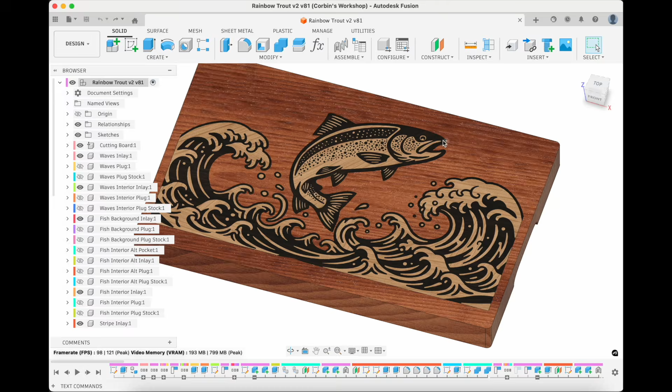I feel like everyone's got their own way of ripping up strips of wood to make an end grain cutting board. But this video really isn't about that process, because I don't think it's really the interesting part. The more interesting part is the design, shown here in Autodesk Fusion. And the design was heavily influenced by this bit, a tapered ball nose.

And before I did any design work, I had to do a bunch of tests to figure out what fit parameters would work best for this bit. I also wanted to figure out the smallest line width that I could actually create. I may do a dedicated video about how to design V-bit inlays for a tapered ball nose, but I'll throw a few tidbits in here and there when I make this project.

One interesting thing I did during the glue up was to come up with these L-shaped cauls to help keep the ends aligned and flat. And I simply remove them after I have a few clamps on and everything aligned. If you're curious about the wood, this is maple. After the glue dried, I planed it and cross-cut a bunch of pieces to a rough size of 1.7 inches.

And it was just a repeat of the same process before, but I didn't really have to get it perfectly aligned. But notice that I did wipe all the glue off the top. And I didn't have to do any additional prep. I just mounted it upside down on my spoil board using some side clamps to hold it on tight. Once I verified it was cutting right, I threw the split dust boot on to keep chips at bay.

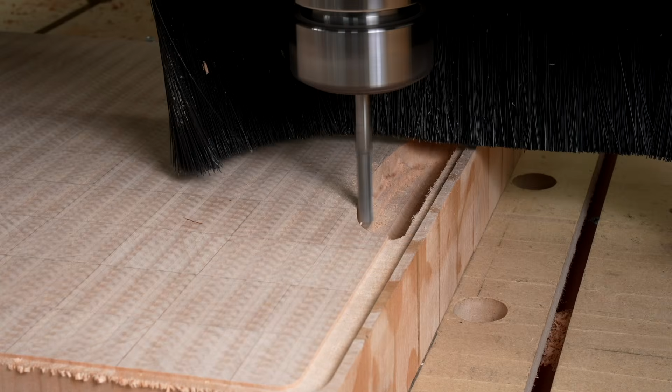Now, one of the things you don't see me doing is touching off the bit or finding the origin of the workpiece. I have dogs that define the work offset, and I just store and reuse them again and again. And I don't have to touch off my bits because I have a tool changer. But more importantly, I use the bottom of the workpiece as my Z0. Even if you touch off a bit on each tool change, you should be using the bottom as your Z0 and touch off on the spoil board. Just trust me on that.

Now, I had to use a pattern router bit to remove the area that the clamps were located. I usually prefer to do this in the CNC, but I would have had to waste more material to do that. At this point, I have a very precise size, a flat bottom, and nice finger grips.

I can mount that bottom down on my CNC table, and I ensure the origin is pushed tight against my dogs. This is a good shot of the side clamps that I mentioned before. You can 3D print these, and if you happen to hit the plastic with your bit, it's no big deal. I want to ensure the piece is perfectly flat on the table, as the next step is the base for every other operation.

Next, I machine the top of the board. My toolpaths are all carefully planned to avoid any chip out. I first do a profile pass, trimming off about 50 thousandths of an inch. I then surface the top with a facing operation, but I leave about 20 thousandths of an inch of the stock on top, and this will come into play later.

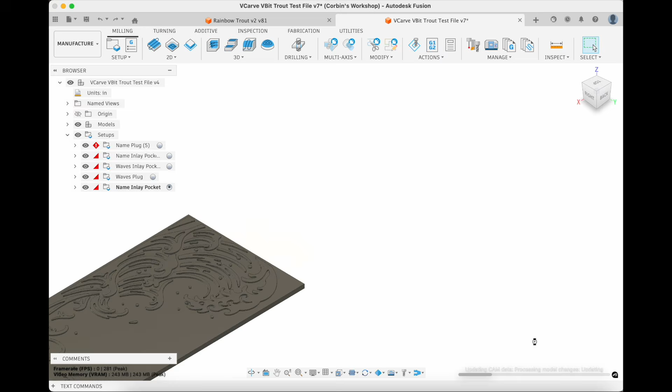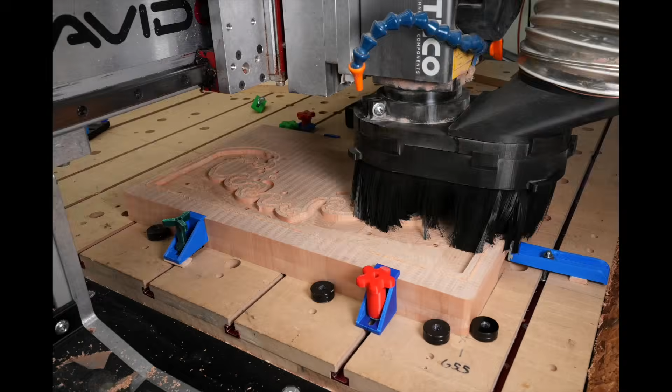In Fusion, you can set a tapered ball nose up as an engraving bit, and it will happily use it for the engraved toolpath. Now, I made two mistakes in this project, and I'm pretty sure that I'm making the first mistake here when I'm prepping the stock for the first inlay. It's a problem you can't see.

And it's probably because I started with some 8/4 walnut, and I should have rough cut the lumber to size and let it sit in my shop for a few days before final milling and gluing it up together. This will later come back to haunt me, and I'll talk about it more at that point. I'm gluing up these pieces at 5/8 of an inch thick.

I'm attaching the plug down to my table, and it's completely rough. I see a lot of people planing their stock flat, and that's completely unnecessary and can introduce inaccuracies. Again, this really assumes that you're going to be touching off on the spoil board and not the top of your stock.

And the trick is to machine the top of your plug stock perfectly flat as the first operation. Then you can VCarve the plug with the tapered ball nose. I also cut the plug profile out with the CNC, and as I was doing this, I was kind of working through some parameters to make sure it wouldn't produce any fuzziness.

In fact, one of the best parts I've seen about moving to a tapered ball nose is that it leaves a really clean cut with virtually no cleanup required. The bit has two flutes and is upcut, which both help with quality, especially compared to a single flute 15-degree VBit like something that I was using before.

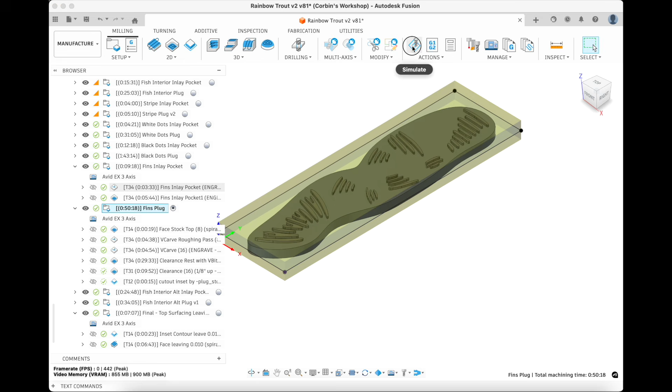Now I take a careful look at the plug and the inlay, the female pocket, and I try to think about areas that are really tiny, where the ball nose didn't hit the bottom and show the actual cherry through. And that means the plug might actually have an issue. Some of the really thin designs might be part of the problem. And this issue can be seen in the simulations in Fusion.

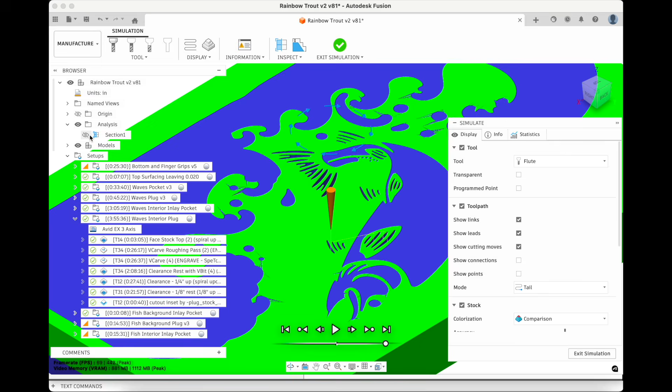This is the small fin plug inlay, and it's one of the smallest details in my design. The plug goes to the full depth and has some angles on the edges at the top of the plug, or the bottom, which will actually be inserted in. I can simulate the inlay pocket, and Fusion lets you do a section analysis to see how it's going. The bit is not going to the full depth for some small details, and the plug would bottom out early in areas like this.

Now I can mitigate this a bit by trimming the plug a little bit. A little bit can go a long way, and with a steep ball nose angle, it really shouldn't be too much of an issue. And the reason the female pocket doesn't go to the full depth is because the design width is too narrow for the bit to fit, and the VCarving engraving algorithm lifts the Z up.

I found that about 40 thousandths of an inch is the min spacing I can get and have enough meat to go into the pocket. I could design the spacing to be the bit's diameter at the desired full depth, but I want fine details. That's the whole point of VCarving.

So after waiting another 48 hours, I could surface the top again. And this is when things started to get real exciting. The wave design was looking fabulous, and stopping at this point would produce an awesome cutting board.

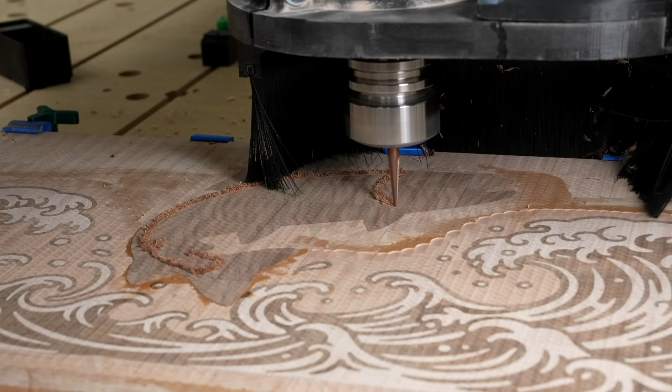But I kept going. This is the background for the fish, and one of the considerations for this part of the design was to make sure I didn't have any of those thin spacings. They would potentially cause the plug to not seat all the way down, and you really don't want that to happen when you're going to machine it again. If those islands aren't glued down the middle, they will simply fall out.

The main interior of the fish was done with maple. I'm a big fan of domestic hardwoods, so most all my work will focus on cherry, maple, and walnut. Once I popped the fish interior plug out, I started examining the areas and figuring out what might not seat all the way down. There were a few of those thin areas that I could pretty easily trim a little bit to make it seat a little bit better.

But a sample fit showed that the eye was causing it to not seat very well. I thought it would be best to glue that part in separately, so I cut the eye out and covered up the eye socket with some tape to avoid getting any glue in it. And indeed, it did seem to fit a lot better once the eye wasn't on it.

So like before, I put a bunch of glue in the pocket and put the plug in, took it over to the press, and squished it on down. I let it stay clamped in the press for a few hours, and then I took it out and glued the eye in. And the eye pressed down just as far as the rest of it, so maybe I didn't have to do the cutout.

Now, my initial thought with this project is that the fish would be a rainbow trout and would have a red stripe on the background made out of cherry. So I glued the cherry plug into the back of the fish, waited for it to dry, and then machined it back off to get back to the same starting point.

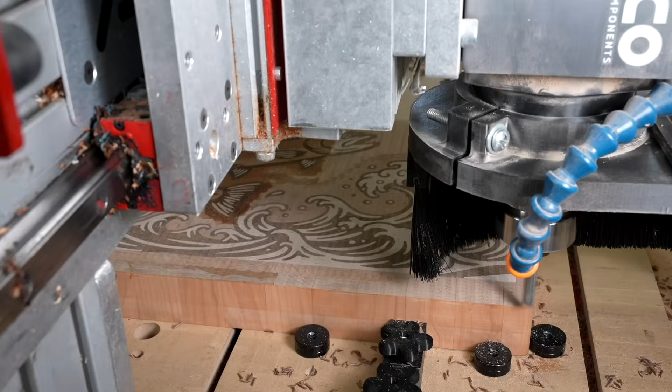No matter how careful you are, I feel like there's going to always be some discrepancies in the heights when you're continually machining the top, and this one was no exception. So I did the design where it was 20 thousandths of an inch deeper than it really should have been, and that way I could go ahead and take off 10 thousandths of an inch to reveal the actual design. And then the last 10 thousandths or so could be used to sand off the machining marks. If you don't account for this, your lines will become thinner and thinner as you take more off the top. I wanted the finished design to be true to my designed size that I did in my drawing.

Sanding is like a cascading effect. I use the CNC to get the top flat, then I use the drum sander to remove the CNC marks, then I use the random orbital sander to remove the drum sander marks. So here's that first mistake that came back to haunt me. I got some checking, some cracks in the walnut.

I've heard a lot of people tell stories on why they think this happens. Now, it only happens because of a change in the moisture content in the wood, and that's it. Too big a glue gap under the wood could capture some wet glue for a long period of time, and it could cause this to happen. But that's not the case here because I know I have no physical glue gap under that walnut.

I think the 8/4 walnut I started with had a higher moisture content in the middle, and I didn't wait any time before gluing up the strips and ripping them into 5/8 of an inch thick and gluing up the end grain cutting board plug stock. I should have given them a few days for the moisture level to acclimate in the wood. It's also possible that the wood already had the checking in it before I started, and I just didn't notice.

I've heard some people say that raising the grain can cause some checking, and I really don't think that's the case because you're adding a superficial amount of moisture to the wood and it's drying off really fast and it's kind of equally applied. I had sanded it to 220, raised the grain, and then sanded it again with 220 before applying the finish. This is just a cutting board oil, and I put some on, let it soak in for a day, and then I buff it up with some beeswax to give it a little bit of a shine.